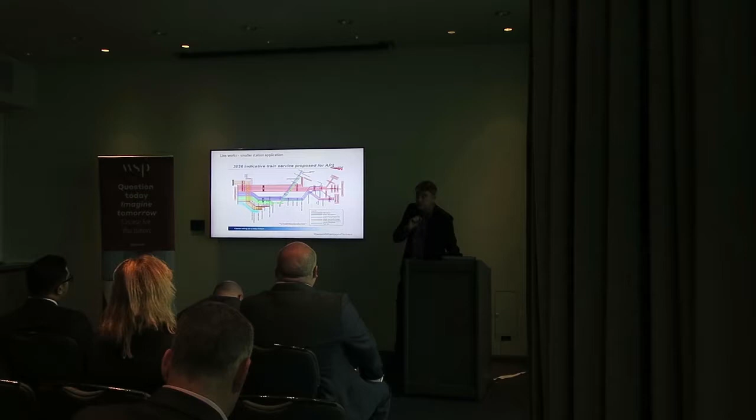This is the work we did for Crossrail, High Speed 2, but linked to the Crossrail extension package for AP2. And this is just a smaller station at Tring, which is on that sort of route.

We look to then say, this is the existing sort of station layout we have, this is how it works. It's a fairly common garden sort of outer station here with the platforms and how that works. We have a little ticket office that's there. It has its own issues, particularly associated with parking and how that works and links to the actual station, the connectivity between the sides of the station.

And this is a scalable concept. It doesn't have to be just the really big schemes - it can be at all different scales across infrastructure.

So just to finalise really, it's about commercially integrating projects, but in parallel linking the community city placemaking agenda with environmental ones as well, so that you have this sort of twinning model between these two. This is the TOD standard that we recommend, and all schemes should aspire to achieving a gold, and I think you can apply those principles.

They're very good structural principles to use.

Just to finish, we conceived of a hypothetical green city project around this for new developments. This has a high-speed centre at the high-speed station, a 3-kilometre zero-car walk area, and high-density nodes within it. It has very strong green urban realm areas before you get into the outer area of the city. I think this is an interesting concept to push to see how you can use this model at the wider scale, in terms of urban placemaking.

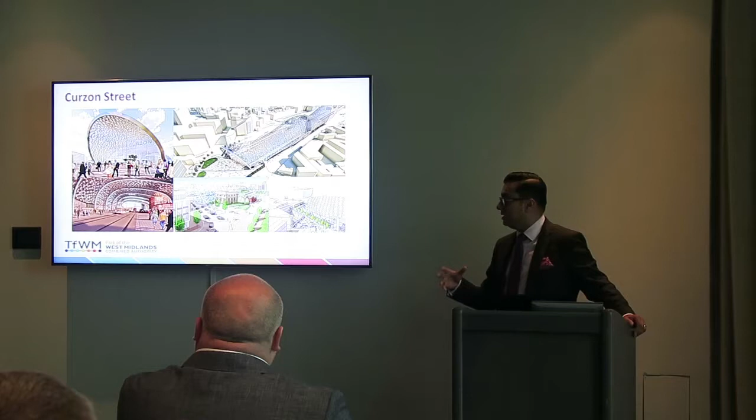HS2 is a catalyst, and we talked about red lines earlier in the previous presentation, and that's exactly the thing that we've got to get away from. This is much more than building just a railway. There is a massive opportunity here, and in terms of some of the work we're doing along with the City Council and the partners for Curzon, it really is how do we maximise the opportunity to really deliver some demonstrable benefits over and above the benefits that will come from having HS2 here in the Midlands.

Now, as part of the overall HS2 growth strategy, the master plan for Curzon Street was developed and launched in 2014, and it sets out a fully integrated city centre station alongside a package of wider interventions that can unlock 140 hectares of underutilised city centre land.

Now, as part of that and the work that's been ongoing, and probably building on some of the work that Weston Williamson have done already, is really focusing on the five big moves that we'd like to see happen around Curzon. Sorry, it's not come out very clearly on the slide, but I'll take you through them.

The first is creating a world-class destination, and this is really about placemaking around the opportunity of Curzon Street. There's Paternoster Place, and the rest of these really come into how do we integrate this station into the rest of the urban fabric of the city, and make sure that we're thinking about connectivity, how people move, and how does it actually work for the central core.

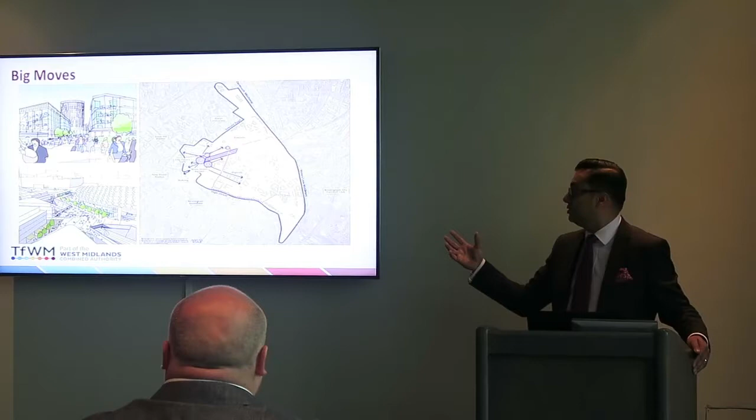So Paternoster Place, there's the metro extension to Digbeth, and again, building on the transport connectivity and thinking about how transport can act as a catalyst, not only for linking into HS2 and the opportunity around there, but also the wider regeneration we want to see heading out towards Digbeth and into East Birmingham, into North Solihull ultimately.

The Station Square and Moor Street, and very much thinking about the public realm and how people move in and around the stations and into the other transport hubs in the area. And then Curzon Promenade and Curzon Square.

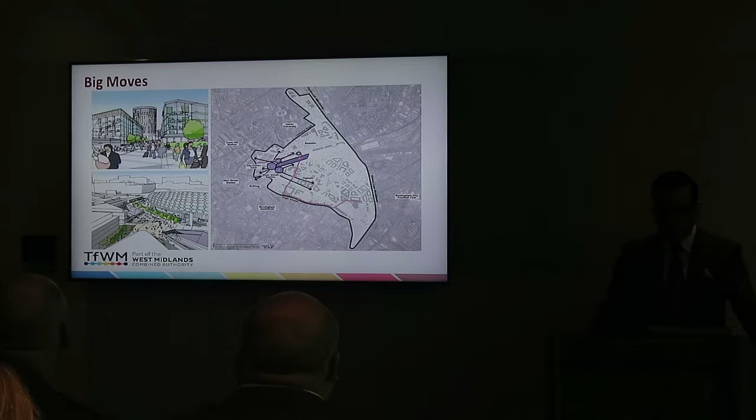So the master plan itself will maximise potential through the expansion of the central business district with over 400,000 square metres of much-needed Grade A office space, provision of premises to grow creative, digital, arts, ICT and sectors in Digbeth and Eastside, creation of exemplar sustainable residential neighbourhoods with over 3,000 homes, and maximising the role of the learning quarter and creating attractive environments for students, researchers and businesses.

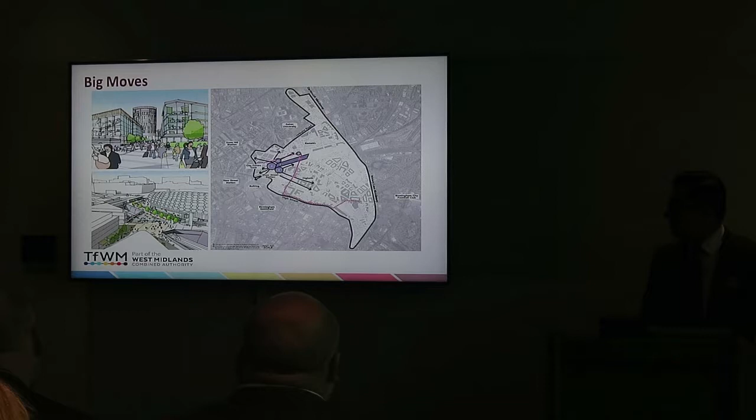Allied to that, and I've already said we're going to get two stations, so aren't we lucky? There is the work that's been going on around UK Central, and this will be yet another huge opportunity in terms of maximising the benefits of HS2 to the area.

So in terms of UK Central, the Urban Growth Company that's been set up published the Growth and Infrastructure Plan just a couple of months ago now. It really sets out the scale of the potential for the growth period up to 2032, having this longer term vision about where we can go with this.

The plan will be underpinned with an evidence base and a hub framework document that provides a demonstrable basis for investment by a range of authorities and private investors, which is a key part of the financing that will come from this in terms of building on land value capture and everything else.

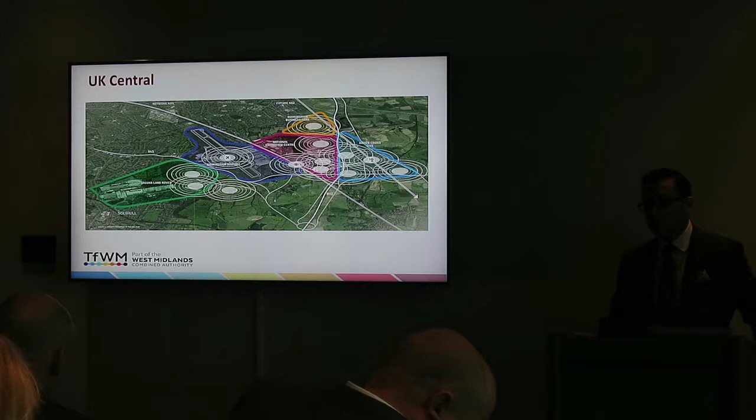It's how do we make an investable proposition here. Touching on the point around early engagement with a whole host of partners and stakeholders, the plan is very much bringing together the wider aspirational growth in the area, particularly with companies like Jaguar Land Rover, the National Exhibition Centre, Arden Cross, and the airport itself. They've all got huge aspirations for growth in that location, so how do you coordinate effectively to make sure this comes across as a single whole?

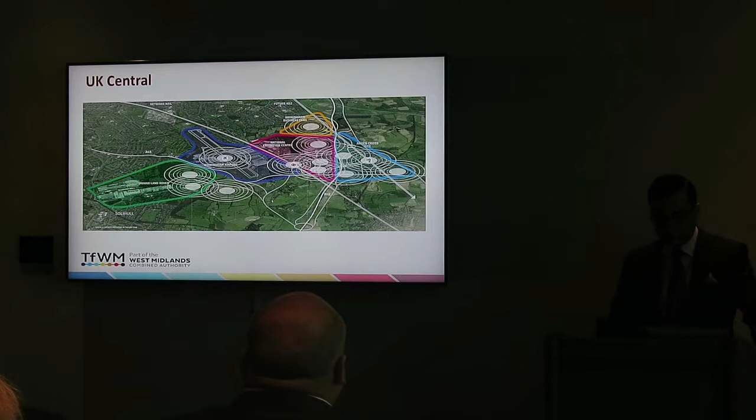In terms of the principles that UKC and the Urban Growth Company are using, some fairly common themes here: it is about infrastructure and connectivity, how that links in with complementary land uses, and how that supports the creation of high quality environments, thinking about the green element within that as well in terms of the landscape and public environment we're trying to create.

Ultimately, this comes back to, if we get that right, and I'm sure the work that all the partners are doing will lead to that conclusion, this is about releasing and realising the potential of up to a £4.1 billion GVA uplift per annum, nearly 80,000 full-time new roles and jobs, up to 4,000 new homes, and 750,000 square metres of total floor area. So some real ambitious plans there.

But it doesn't always have to be about huge scale. The other angle I wanted to come at here is those examples have been about big stations, big transport hubs, and I want to focus now on what we can do on the smaller scale, thinking about individual stations along corridors or lines that we currently have.

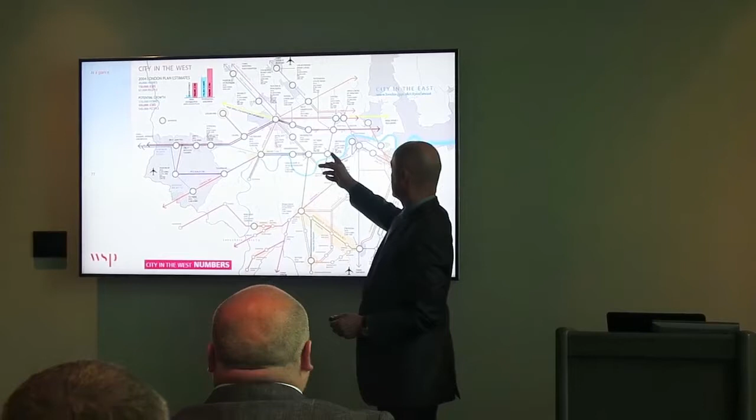That's a problem. The reasons behind that shortfall are fairly complicated, but one element is that I think a lot of the supply is dependent on big infrastructure. This is a diagram from one of the planning documents showing a number of nodes with the numbers of homes and jobs forecast to be released there, connected by existing and future transport links.

But the dependency of development on some of these new transport links means that the development delivery takes on the risk of the infrastructure delivery—the risk of delays, decision making, land acquisition, funding, and so on. I think this contributes to the shortfall in delivery.

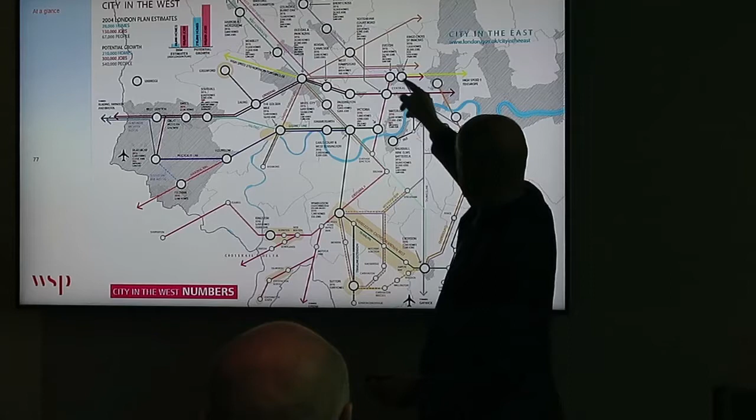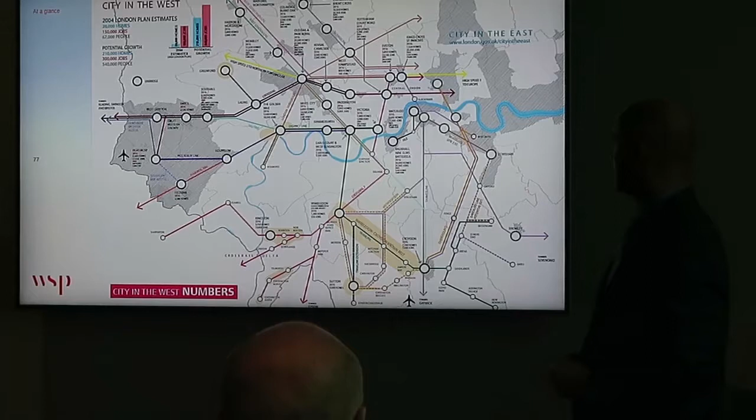There's a scheme which runs right through this, connecting a number of the important nodes together: Thameslink. I remember when that project used to be called Thameslink 2000—it speaks for itself in terms of the delays. Here we've got Crossrail 2, which Christian mentioned, a really important scheme, but the timescale's already slipped and there's still a bit of uncertainty about the funding. I could go on, but suffice to say, I think there's a real need to look at how we can be creative with some of the existing infrastructure.

So to move on to some examples, this is a project I started working on in March 2007, and some of this has already been built out now. You might recognise the footprint of the Earls Court Concert and Exhibition Centre—it was an Olympic venue. That's now been completely demolished as part of the enabling works.

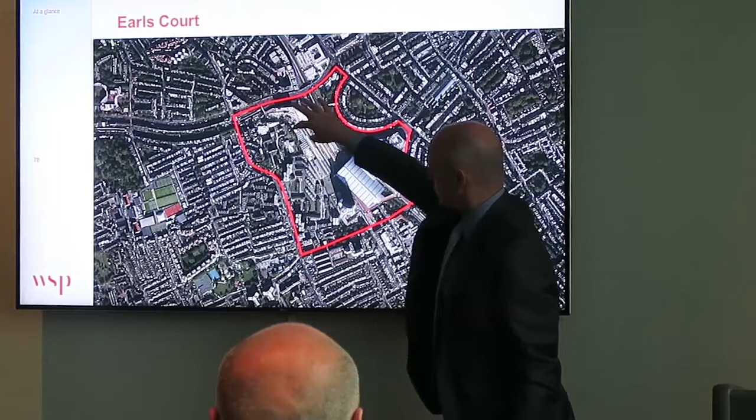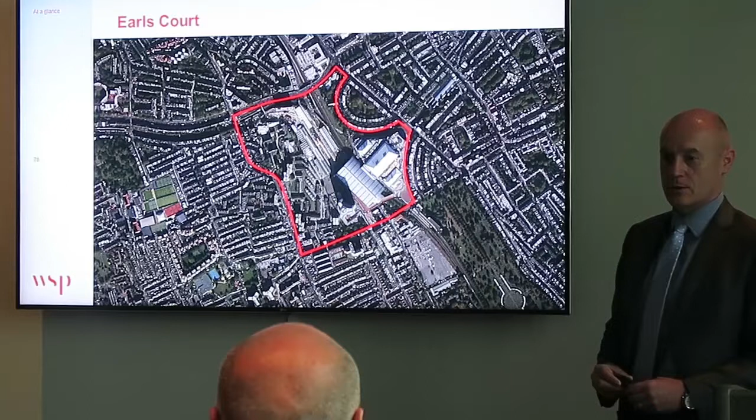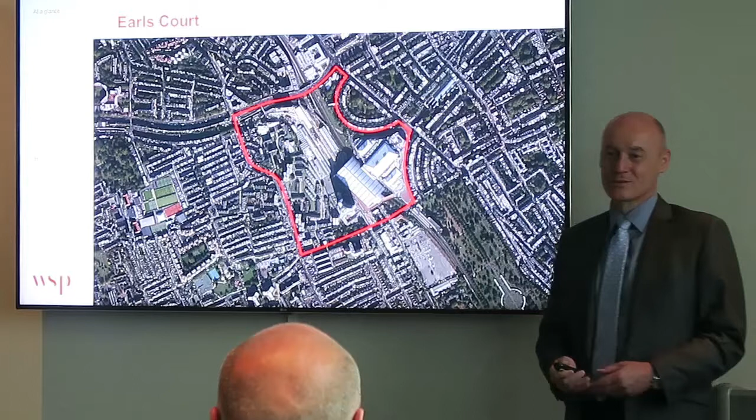This was owned by our clients, Capital and Counties. We then have some Transport for London land, which is a mixture of live railway lines across the site and some maintenance depots, and then there are some Hammersmith and Fulham housing estates on the other side—three landowners inside the red line. Ironically, it's the transport infrastructure that takes away the connectivity from this area: there's no east-west connectivity or permeability, and it means the site is fragmented.

So despite the fact that ostensibly there are some very good transport connections here, with the Piccadilly line in blue and Earls Court Station, two branches of the District line and their stations, the West London line going through the site - these actually serve to split up the site. So people living in this area really don't have the opportunity to access Earls Court Station.

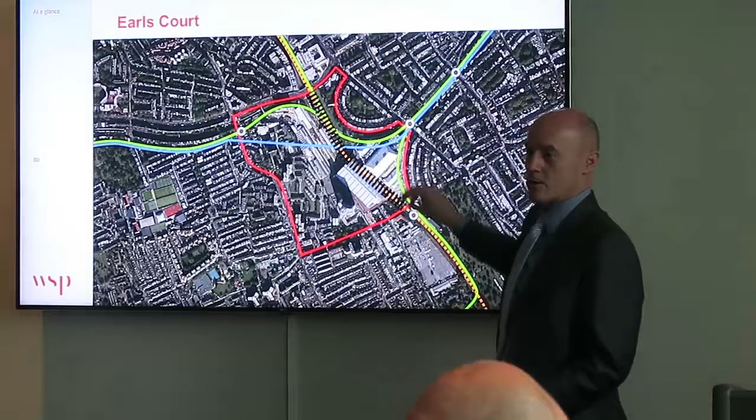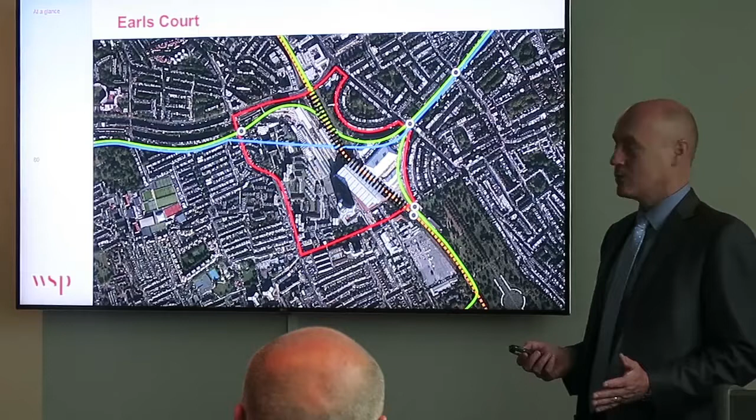So in terms of working with the team on the master planning, one of the big moves was to look at decking over the line to create that east-west connectivity and bring the site together. We also looked at adapting each of the three stations on the periphery of the site to improve them and increase capacity, and improve connections between all parts of the site and those stations. That meant there was quite a big development opportunity which could be brought forward by adapting the infrastructure which is already there.

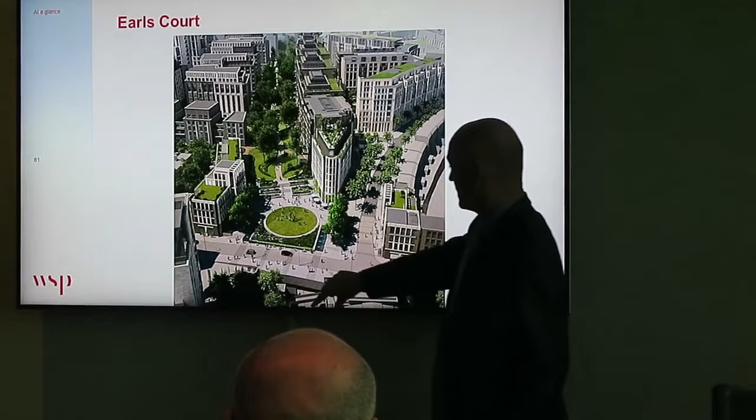This is an image of the consented master plan. Some of this has now been completed. The rest of the master plan adds up to about 10 million square feet of development, so 7,500 homes - quite a lot that can be delivered by adapting what was already there. We're currently working with the team on a further master plan which would add 40% onto the development area in the site. The West London line, which severs the site, now runs under this linear park which sits on the deck, because the deck hasn't been put forward as something to build on top of. It's there to facilitate connections and provide attractive public realm.

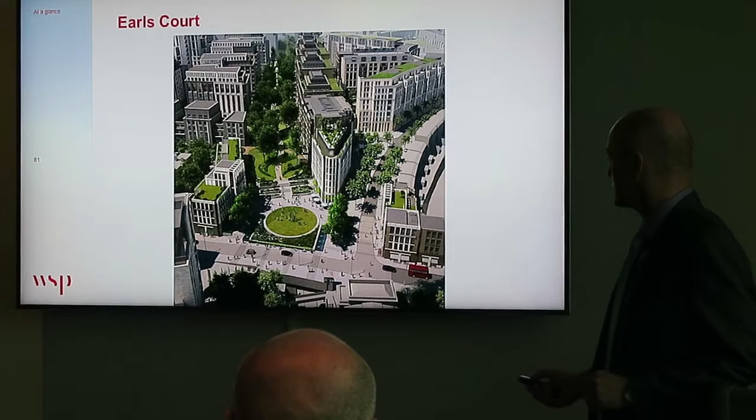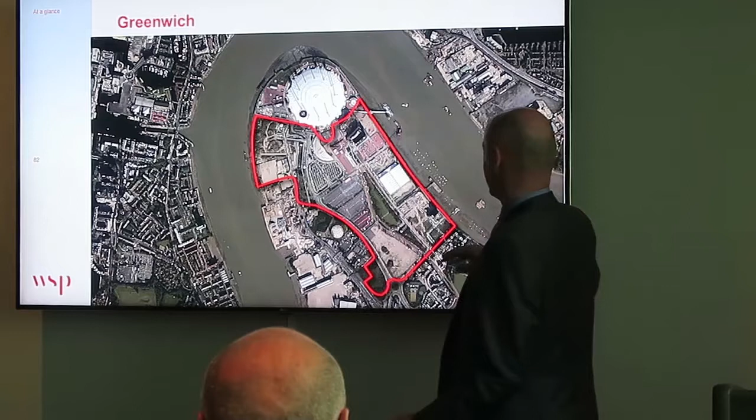The next example is something we really started on in earnest in 2014. This has come together fairly quickly. You might recognise this from the opening credits of EastEnders. It's got quite a long history with the Millennium Dome at the end of Greenwich Peninsula.

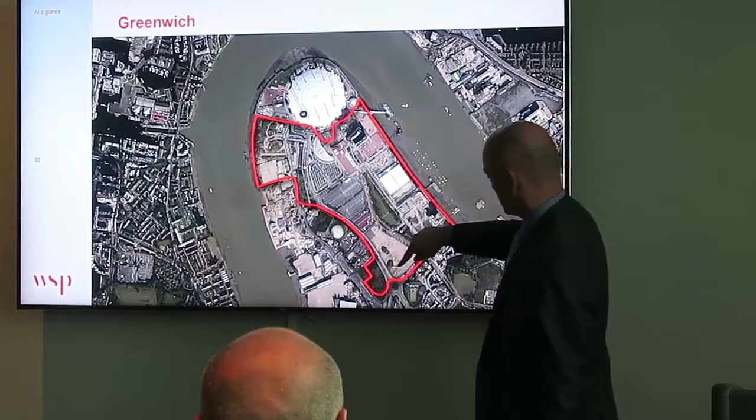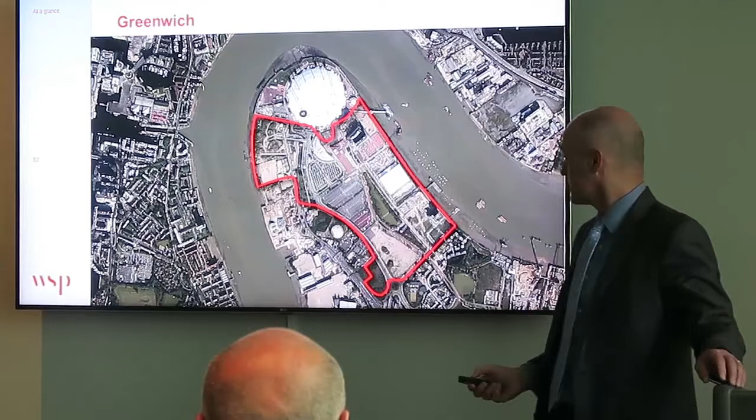And you might be able to see that we've also got transport infrastructure, some major highways which in fact separate the sites between the east and the west. There are good public transport connections in terms of the Jubilee line - Christian mentioned the Jubilee line extension. This is part of it coming to North Greenwich Station, and there's an existing bus station which wraps around this.

We've got a cable car built just before the Olympics, not very heavily used. River bus services in blue, which are becoming more heavily used, and quite a lot of bus services which come from the bus station - it's effectively a cul-de-sac as far as the bus network is concerned.

But the issue - the transport infrastructure is already there, but in terms of bringing this forward, we need to deal with the severance caused by the road infrastructure, and ironically the bus station, because when we looked at it with the team, we found it was in the way and was contributing to a lack of connectivity across the area. So when this was acquired by our clients, Knight Dragon, things really started to move quite quickly.

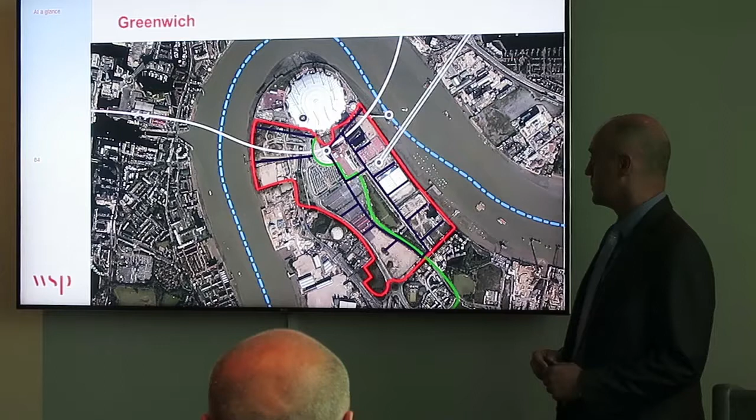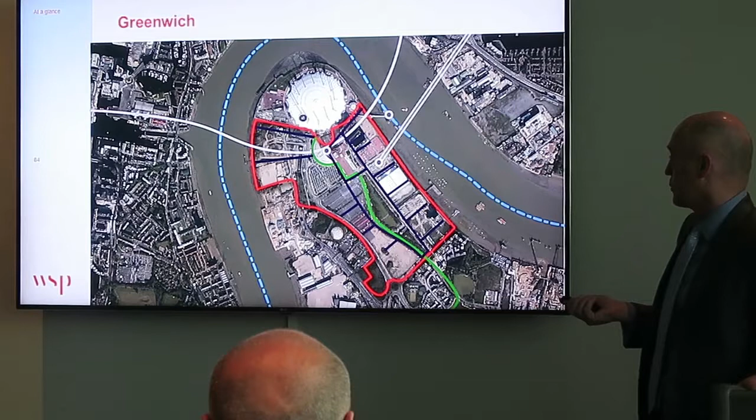We looked at how the severance could be dealt with by a combination of bridging and decking over the roads. Designed a new bus station to move that out of the way so it would better relate to the developments rather than simply relating to the tube station. And we looked at how we could improve facilities for the river bus services, and start to establish a framework for development.

So this, three years later, now has a planning consent, and elements of this are now being delivered. It's 15,000 homes altogether - a lot of housing delivery, plus other uses, employment, social infrastructure, but achieved by adapting the infrastructure which is already there.

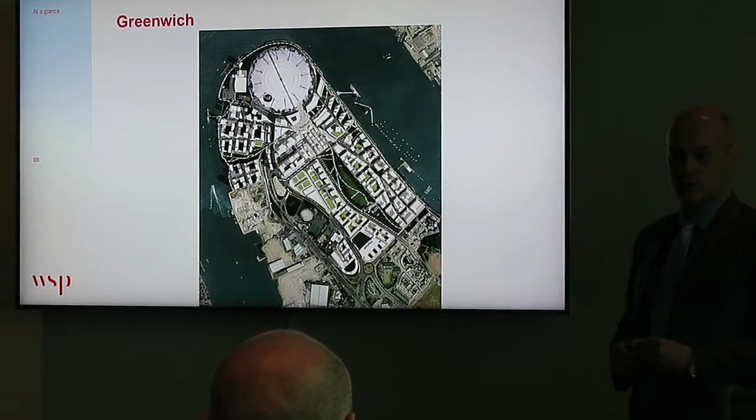We've then got the example of the Kidbrooke Estate in southeast London. There was a very run-down estate, really poor - it had become a really poor environment for the people who lived there. Lots of deprivation in the area and poor quality housing stock. So at its time, this was the largest estate regeneration project in Europe - a 4,500 unit redevelopment.

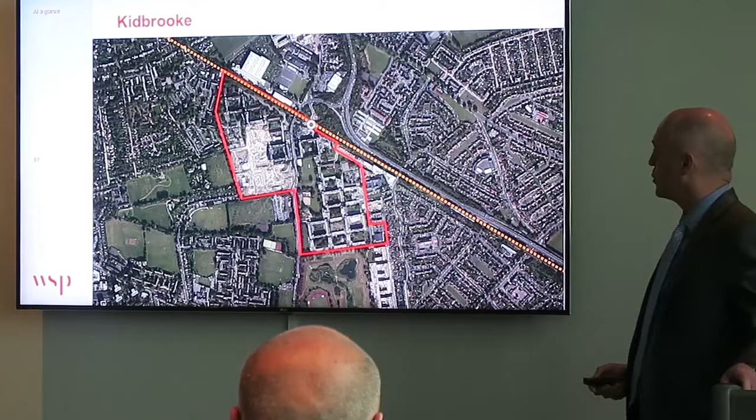There's an existing railway station which was also a poor quality station in its own right. There were some bus facilities on the north, but not very well connected to the surrounding area, and which also needed investment. I was the transport witness at the compulsory purchase order inquiry for this in 2010.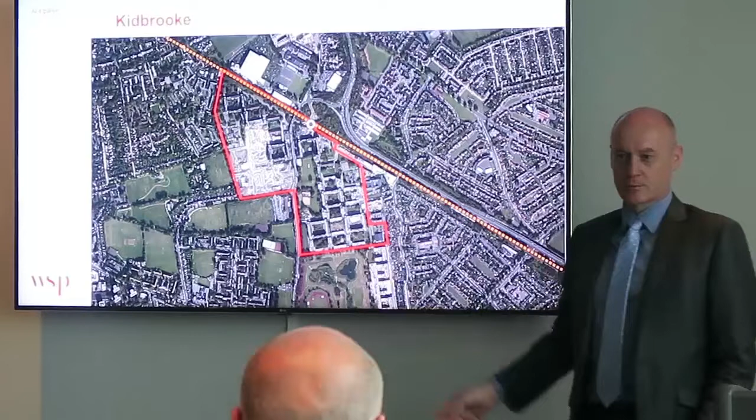And one of the biggest issues, which you won't see in an aerial view, is the level differences across the site, and the way the site had been designed, with a number of steps and elevated walkways - it really meant that it wasn't well connected, permeable, or an attractive walking environment.

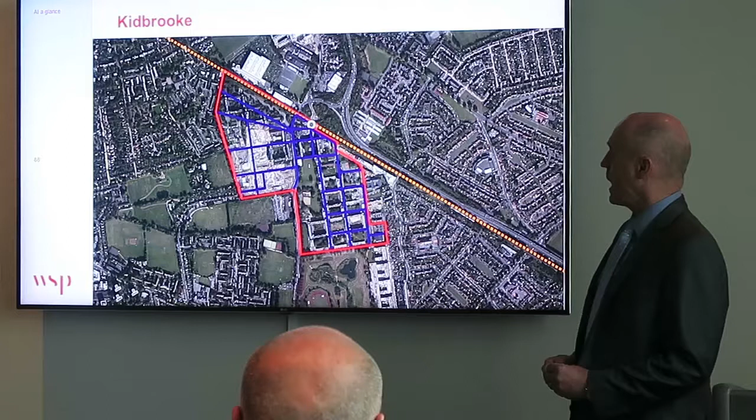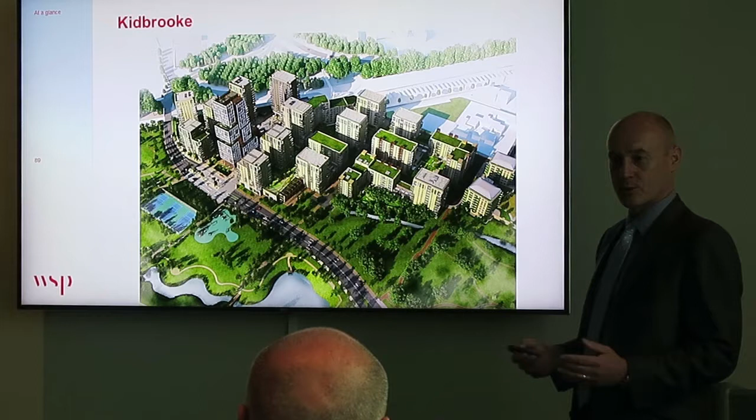A lot of the proposals here have involved extensively regrading the site to make it accessible, and to link the area into the station, which is being upgraded, and to improve the bus interchange. So this is a CGI. Actually, a lot of this has now been built out. So delivery has happened in a relatively quick timescale, and again, all of this has been achieved by adapting the infrastructure which is already there through a combination of imaginative master planning and looking at what we could do in terms of the hard engineering and how things could be re-engineered to make development possible.

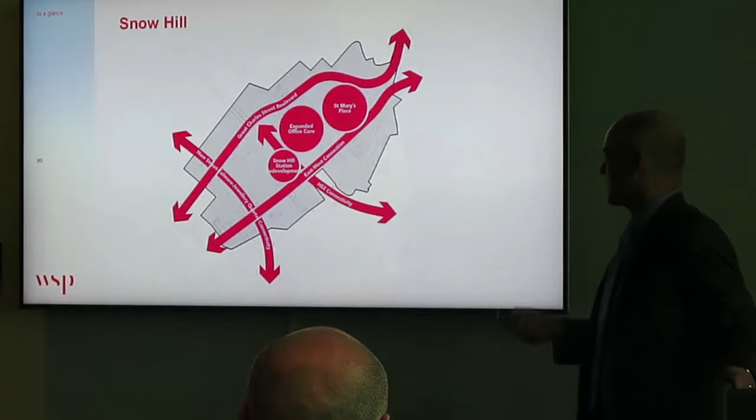I'm going to join the hat trick of presenters who have mentioned Snow Hill, because Richard and my colleague Karen Evans put this forward as an example of something which has got similar themes to the ones that I have been talking about.

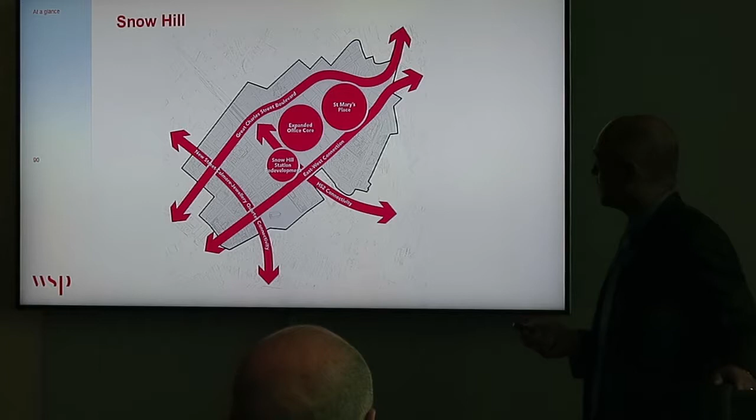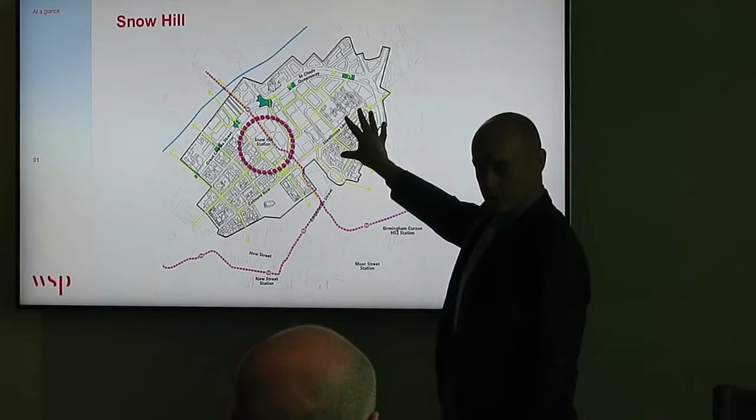You're looking at how we adapt things which are already there, and then better connect them into the surrounding area. So a couple of screenshots from the published master plan for Snow Hill. I know things are evolving in the area, but the principles of an existing station, looking at the future opportunity of adapting that to accommodate the metro, having a better established network of connections in the area, and crossings of the roads which otherwise take away the connectivity and permeability of the area, and looking at strategic connections between this area and its station, and existing stations in the case of New Street, and looking to the future with Curzon Station.

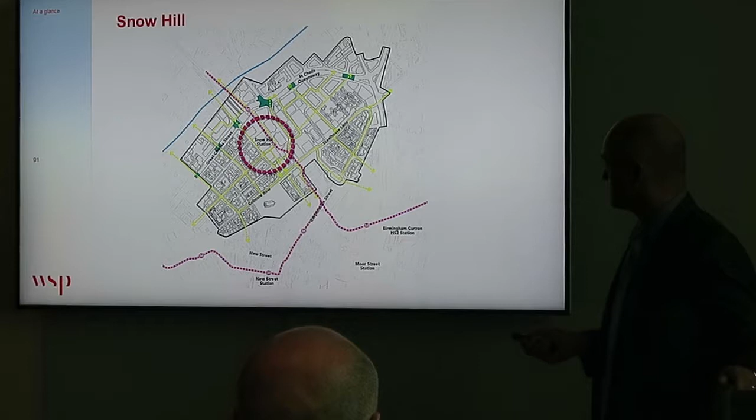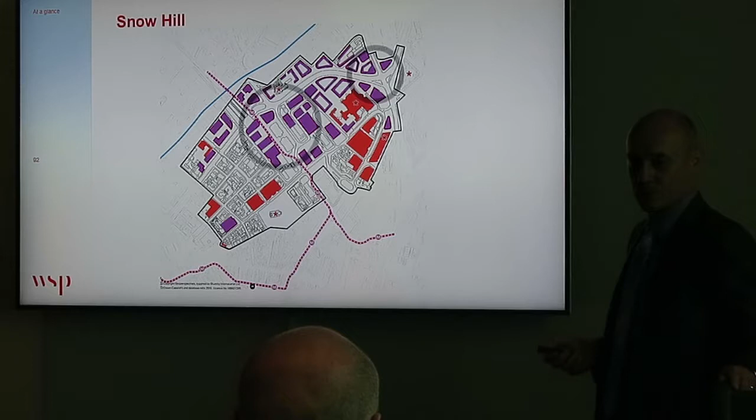And the published master plan version of development, which can be brought forward, is highlighted here in the purple colours. So a number of examples along that theme about how we can reduce some dependency on the delivery of brand new major infrastructure, and see how we can achieve the most by adapting what we already have in the shorter term. Thank you.